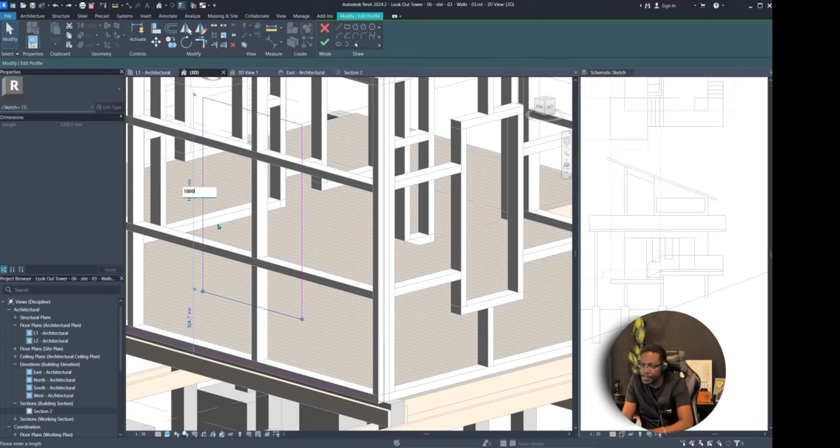Let's go back and edit these windows here. Notice you can click on the individual elements or on the wall - make sure you're clicking on the wall, and you want this to be 600, and the height of the window to be 1800. We need to adjust the temporary dimensions from this. Okay, there we go with the walls.

Now we're going to need to put a rail in here that goes down, so we'll do that at a later time. We need to put the column here that goes all the way up for structural support, so we can use this stilt column we used before. We'll go to column, architectural column, and there we go. Oh, we need to set the base, where the column is going - let's put it in first. So we need this to be at level 1 lower, and the top goes to level 2.

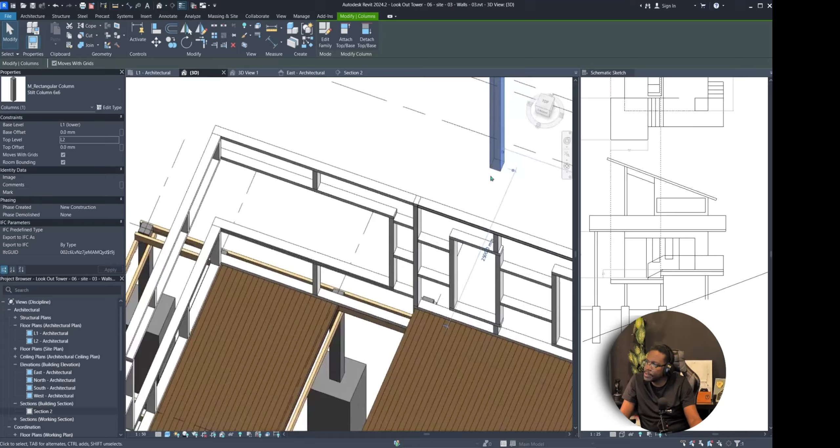All right, now we're going to move it into place. We can use the plan view and put it right there. So this is going to be our structural support. Now we need to add the coverings for the wall, the windows, and the doors.

To do that, we can use the 3D view or the plan view, whichever. So if I'm in the plan view here, I'm going to delete this section view because I only needed it temporarily to help with the windows, so it's going to delete the drawing as well.

Now in this plan view, notice that the floor is not showing the wood material, but that's okay. We can still identify where it is, or we could go to shaded view, which would show us where it is. So I'm going to keep it on hidden line.

All right, so what we need to do is put on those wall coverings. Oh, we do need to adjust this wall - this should actually be on the grid. So we move this in and adjust it. You want to make sure that all your walls are centered on your grid.

Okay, there we go. So that's another point, guys - you want to make sure that your walls are centered on the grid. That's something I'll be looking out for as well, because you have your grid lines there. So just double check and make sure that they're centered.

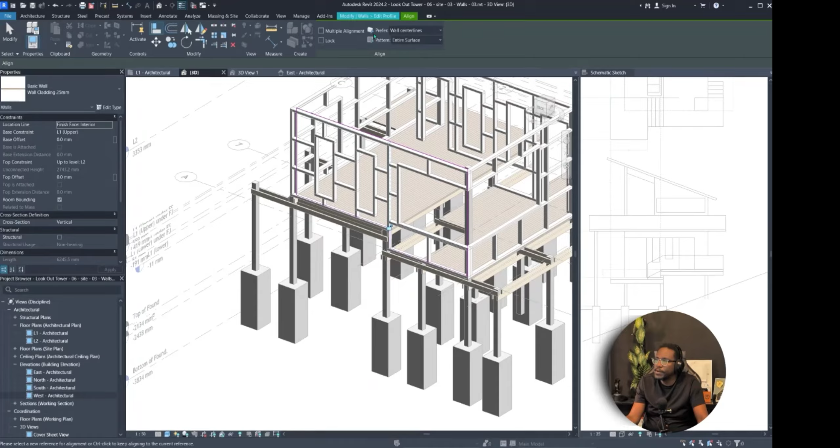Now, of course, we need to edit this part here. So to do that, we're going to use the same profile, and we are just going to draw a profile like that. All right, so that's the profile of our wall. Let's choose OK, so now we have that profile all done.

Now what we're going to do is see if we can duplicate this, mirror it, and then we'll align. There we go. And we need to make some adjustments - let's make this a little bigger.

Let's go to the top view and put this back in the corner. Make sure that this is on the level 1 lower level. Then we're going to put the other walls in and put these on the level 1 upper level. All right, so now we've completely placed all of the walls.

Okay, so now would be a good idea to place the windows before we place the outer walls. So let's get the windows in. For this, we'll be using some fixed windows.

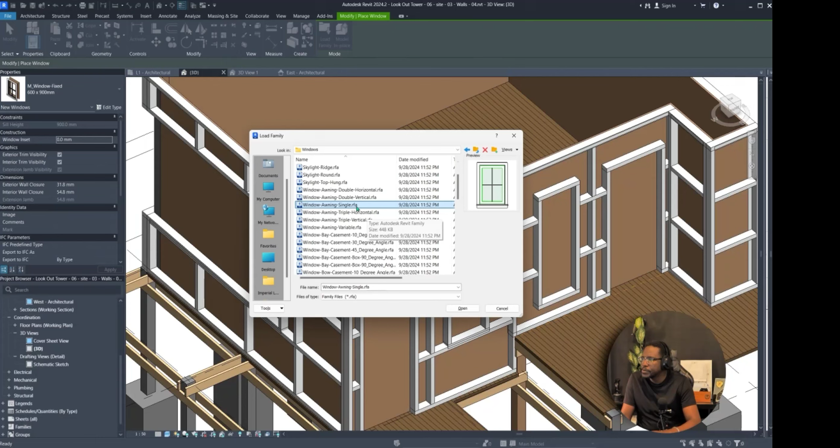So to do this, we're going to have to go to load family, and we will look under windows here. We have a few to choose from here. Okay, let us try and work with these windows and see if we can modify them. So let's go to edit type.

Before we do this, we are going to do it on the exterior. So I'm going to use the mirror tool and mirror this. Then I'm going to delete this tool here. Then let's put back these windows and let's remove the mounting.

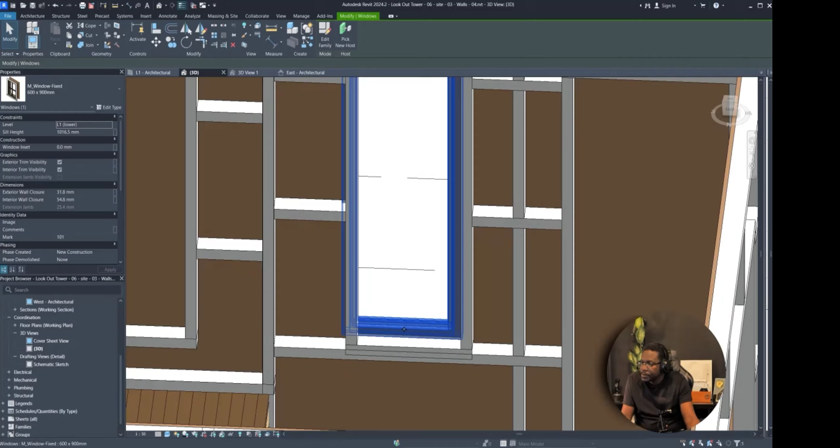For the exterior, we could go without the sill. There we go, so it's just plain. Then let's choose the same dimension as the window, so the width is 600, the height is 1800. We can actually move this around so that we can align this.

There we go, so we have the sill height here. You said to center it on the grid, right? The wall, yeah, but I mean that's recommended. But because when I center it on the grid, it takes a lot in on my internal space per se, and my floor slab is projected on my floor. Right, because it depends on how you position the grid.

The proper way to do that is really that you would want. The proper way to do that is when you draw your walls. If the walls that you draw have their location line at the center, then you're supposed to put your location line on the grid. So what do I mean by that?

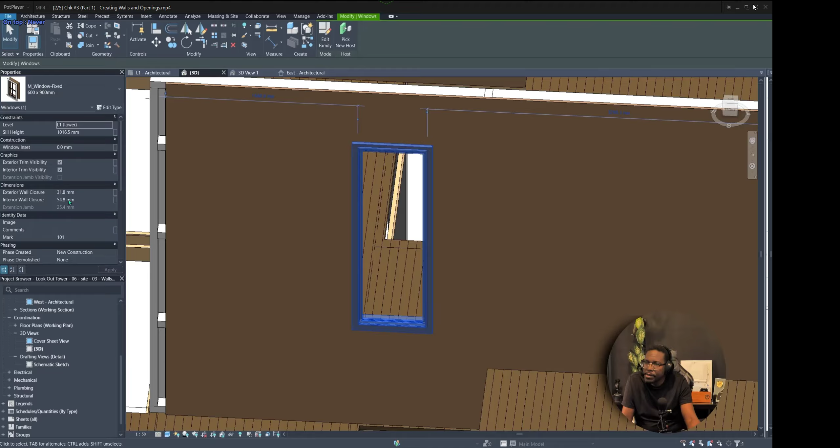So for example, well, this is not always on top. Okay, hold on. Okay. Right, so for example, if I draw a wall, right?

The location line that you see here determines where the center line is. So in this case, the location line is in the center. But I could also choose to draw a wall where the location line is on the finish face interior, so that way the location line is here, right? So when I click on it, you can see these two dots here that tell you the location line is on this side, and this one that the location line is here.

Whenever you draw a grid, the ideal way, this is what you call best practice, is that the grid should go where the location line is. So in this case, the location line is in the center, so it should go in the center of the grid. And in this case here, the location line of the wall is at the end, so you would put it here. As I said, guys, this is just best practice.

You could still have your grid here and make it align with the center of your wall like that. Sure, it's not going to cause your Revit to explode, but Revit is a tool. You guys are just learning it now, but the more you use it, the more you will realize that the best practices add up and they will bite you in the butt in the end if you don't follow them.

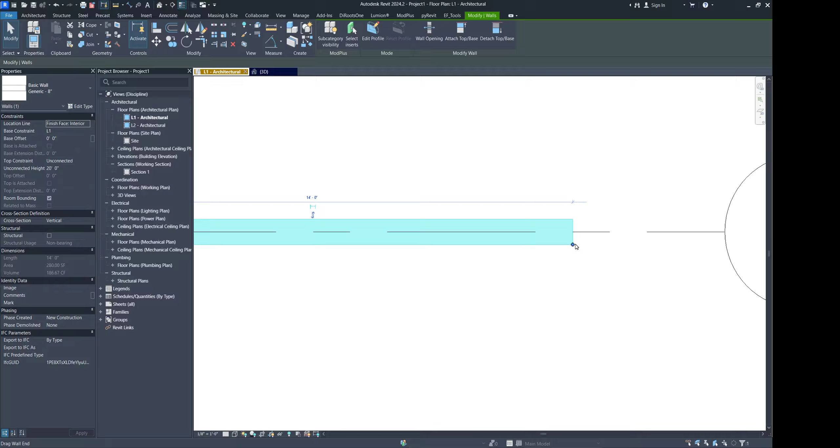So with that said, what I'm marking for is having your grid and showing that your walls are aligned with your grid. So regardless of wherever your location line is, if you have a grid line here, I'm using the grid lines to track how your structure is laid out. It is up to you how you want to align it to your walls. If you want to align it like this or like that, totally up to you. It doesn't have to be in the center.

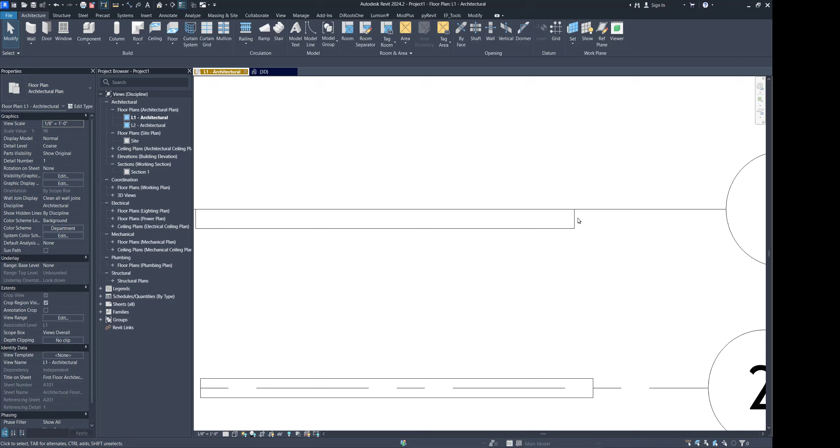All I'm advising you is that if you choose to align it to one side, the best practice is to move the location line of that wall so that it is aligned with your grid. It's just a good practice for you to have in Revit generally. All right? Okay, yeah man. All right, let's proceed, let's see.

That's okay. Okay, let's copy this. Now let's adjust this wall here. Let's align edge of this. Okay hold on, let's see if we can select it. There we go, and let's adjust this.

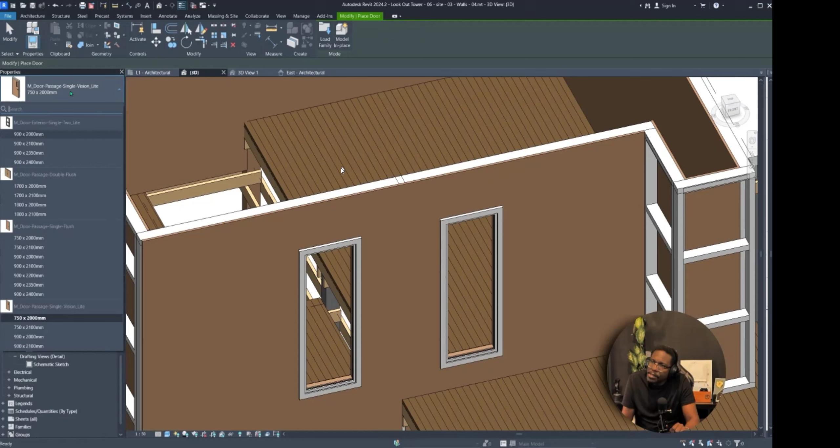Our case might be a little different because we're using a wall for the center, and then we're also using a wall for the covering. This is for the cladding, right? What I would do in that case, if I was creating a wall like that, is that, in this case, the curtain wall is acting as the core of our wall, and then the cladding is acting as, let's call it, the finish, right?

So how I would arrange my location line there. Imagine that I have a curtain wall here. Let me see if I have one built in this project. Oops. Yeah good, I have a storefront. So let's say I'm using this as my grid, my stud here.

Sir, what was the thickness of the panel? Like 1 inch? Yes, 1 inch. Right. So I can, let me see. How would I do it here?

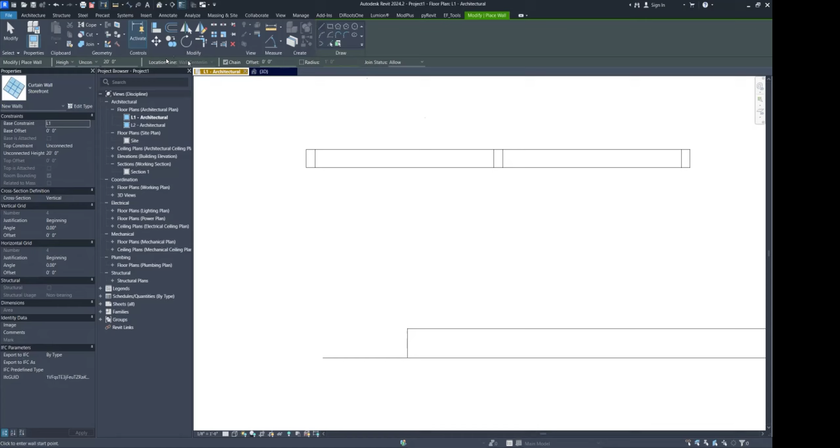Oh, well, with curtain walls, your location line has to be in the center, so you can't change that. So yeah, that is just how it is. Because you see here that the location line for curtain wall is grayed out because it has to be in the center. So that's fine. So if I had my grid line in this case, my grid line could be anywhere. It could be on one end here, or it could be on my center location line.

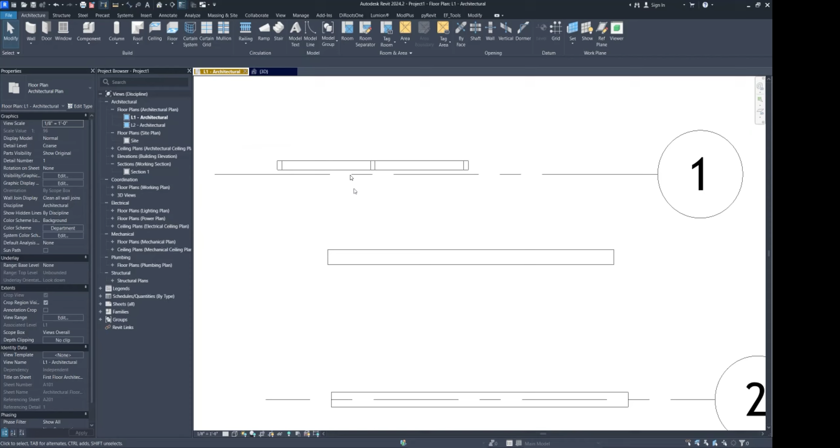Doesn't matter. But when you guys are doing your drawings for your housing project or whatever, chances are you won't be using the curtain wall. You'll be using a regular wall, and that is when that rule applies: wherever your location line is for your regular wall, you want to try to put your grid on it as a best practice.

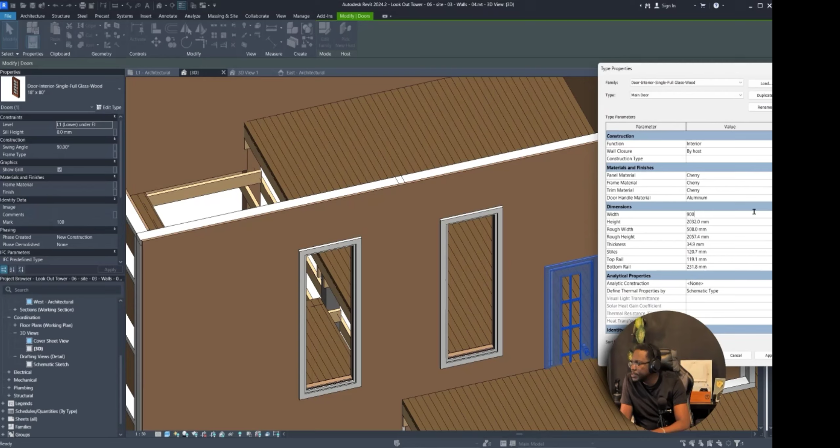All right, let's proceed. Then we're going to call this main door. Let's just call it main door for now. And we'll make the width be, I think it was 900. Oh, actually, okay, let's go for a bigger door. 36 by 80. Yeah, this one. There we go. And if we look back at our profile, let's see. That was 900. Yes, it was. Okay, so we're going to make this 900.

Oh, wait. Actually, we can use the arrow keys to nudge this over. There we go. All right, so let us do the rest of this. Let me mirror this. We're going to do the same thing for this and same for this. Let's pick a window, and we're going to duplicate it and call this front window. The width, let's look at the profile. It was 1200 actually. I think this one we can put back the mounting.

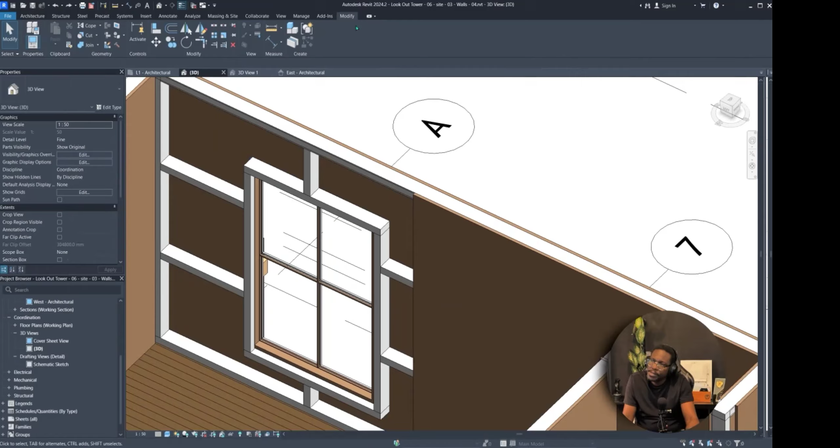Let's see if this will work. Let me open this up, and if we go to the move tool, we can grab this in the center. Actually, what we can do with these windows to make sure that they're centered is go to the plan view, and this is that space that we have here, so we can just grab it at the center of the window and move it to the center of this space here.

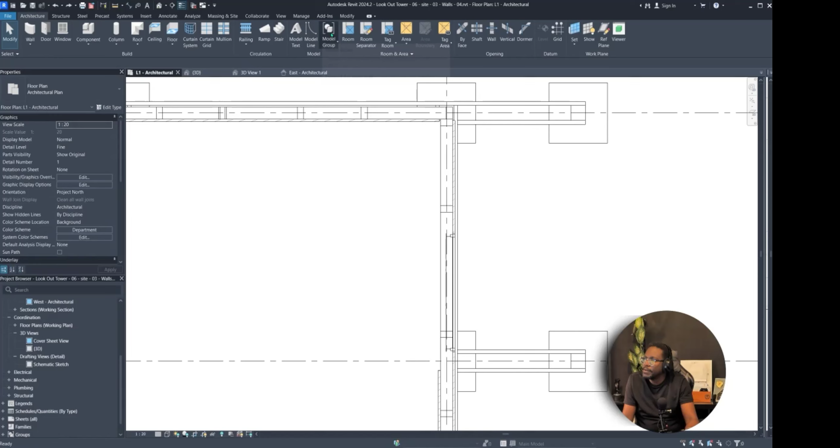If I use my dimension tool from here to one edge of this window, no, actually, let's use the model line, okay, let's use the detail line because we don't want to have to worry about the height. So we use the detail line to outline this, and the shortcut for detail line is DL, and we can move this using the center. There we go. So we use this as a kind of construction line, and with the detail line, we don't have to worry about it being in 3D space, right?

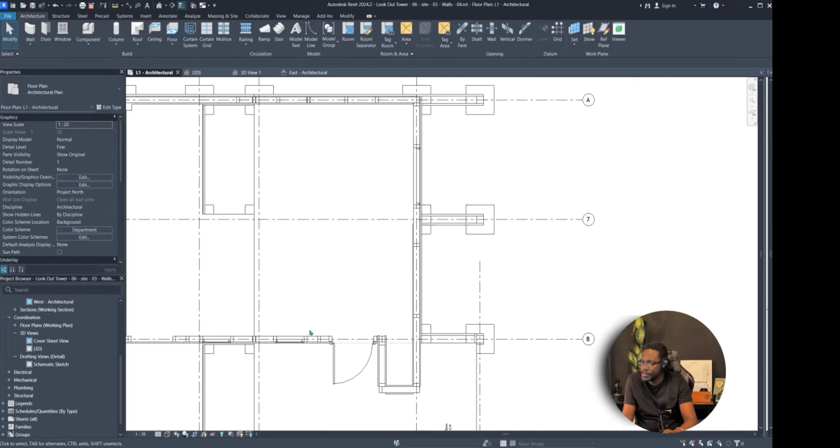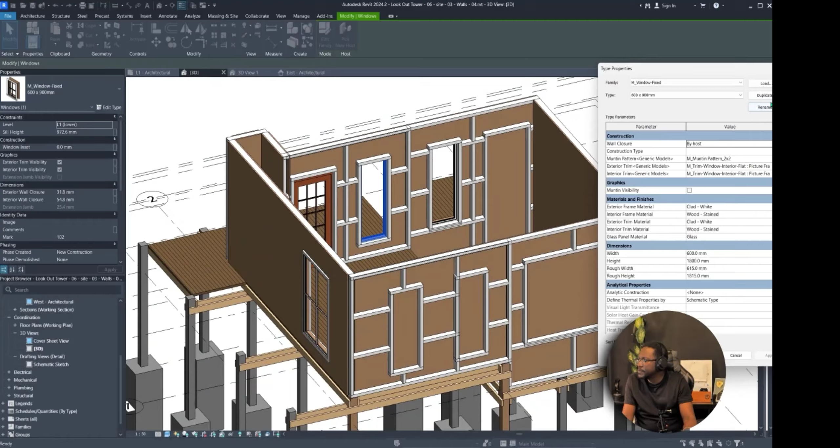So now we know that this is centered, and we can do the same thing with these other windows because we need to center them in this space, and I don't think we're going to find the center of this space so easily. Let's see. Yeah, that's the center. Do the same thing here. Okay, let's go back to 3D view. Let's get in these other windows. We actually didn't rename this, so we need to rename it and call these main windows so that we can identify them easily.

All right. Always a good idea that when you create your windows and doors, when you duplicate the family, give it a name that you can recognize. When I mirror this, it should, yep, there we go. All right, let's close up these walls. Okay, so we need to add in a window here and a window here. Oh, there are actually 3 windows.

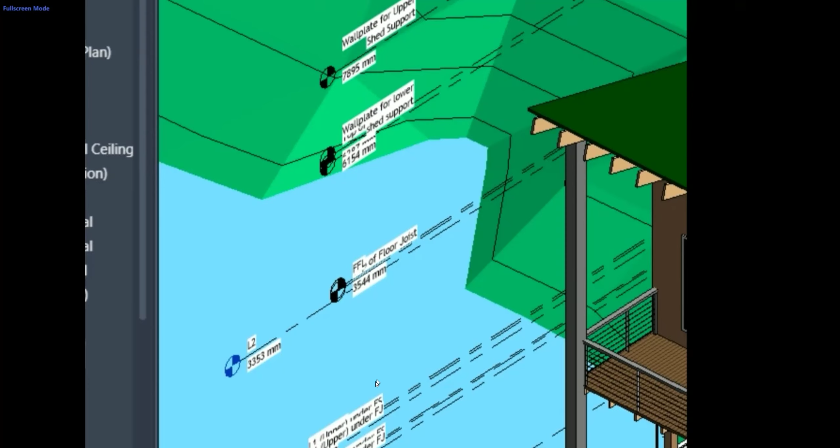Let's go from plan view. Okay, so here are the windows. So it needs to go in here. Let's grab this. Don't think this is the center because there are 2. Whoa. Oops. Okay, give me a second here. Did I mess this up? Give me 1 second, guys.

Okay, so right. So I was dealing with that corner window. My bad, I seem to have pressed something. This is our outer wall here. So we're going to go to wall and we're going to use curtain wall, the storefront, and we're going to start from here and we're going to draw the first wall all the way to the end there.

So what I'm doing here is that I'm using a storefront as my window, right? So you don't always have to use a window for a window. If your design has something that you don't have a window to represent, you can use a storefront as a window. So the curtain wall is very versatile because you can use a curtain wall as a wall, and you can use a curtain wall as a window as well, right?

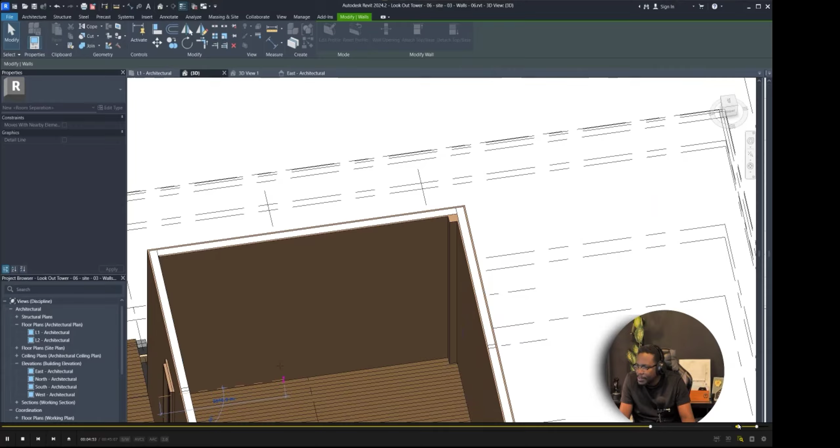So that corner detail that I have as these triple windows is right here. So rather than choosing three different windows, I just chose to use the curtain wall as my actual window. Open this wall up and we'll do the same thing here. Kind of open this up. Right, so you can see that we have the wall here. Now, in order for this to be a corner window, we would need to take this all the way to the end. So let's align this with...

Yeah, go ahead. Sure, so you're saying we can just put a glazing in the window openings in the curtain wall instead of putting an actual... Well, you do have to use windows because I mark for windows. So right, you would have to put a curtain wall in that space. It wouldn't be practical. From a construction point of view, that's not how it would be built. And we're still guided by that principle when we're marking, right? All right, sir. So I would use a regular window.

Don't forget that you have to use louvers in the design. They don't have to be louvered windows, but somewhere in your design, you have to use louvers. You can choose if you want to integrate it in your window, in your door, or you just want it to be a separate thing. In my case, I chose to make it above my doors. You have a transom that is louvers. That's how I chose to use it. But it's a decision that is totally up to you guys. How do you want to incorporate louvers in your design?

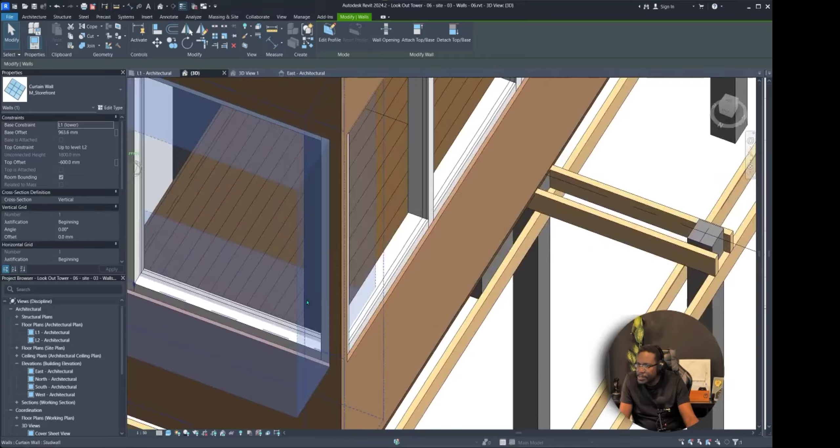Now we actually need to carry this all the way to this edge here and carry this one. If we can find the end, there we go. All right, now what we need to do is use tab to tab into the frame, and we need to unpin it, then delete it. Same thing for the other frame. Unpin and delete. So notice, guys, that you can actually delete elements in your curtain wall, but you have to unpin it first. So even if you're creating the studs and for whatever reason you don't want a stud in a location, you can just tab into that specific curtain wall element or that stud and just delete it.

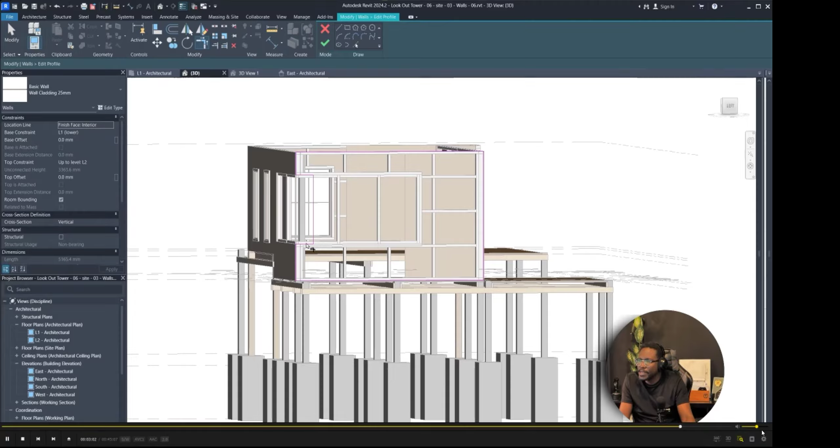We're going to edit the wall profile of this wall and this should work. Yeah, we have some weird lines here. There we go. So you can see the wall profile is like this. Okay, now we need to do the same thing for this wall here. So we're going to align this. All right. Now we do need to figure out the internal walls, but we're going to do that in just a bit.

We just have one more door, and this door here should have the transom above it. So we're gonna copy this door, put it there. Oops. And line this. Okay, let's look at the top view. Now we did say we wanted to have, hold on a minute, I think this needs to be flipped. Okay, let's save. Right, so we do want this to have a transom above.

So we're gonna insert like a louvered window. So we are gonna go to Windows. We're gonna have to import this window. So let's look under Windows. Let's see if we can find it. There we go. All right, that's it. Now we know the width of this window is 900.

All right, now we can deal with the internal walls. So we need to. Okay, we can use this one. Oops. All right, so it also duplicated the windows as well, so we don't need that. So now what we want to do is attach. Okay, wait, let's fix this.

Now what we're going to do is attach these together. So we're going to use the join tool. We're going to join this wall with this wall, and that will automatically give us all the cuts. So let's use the join tool and join this wall with that wall, and this wall with, and this with that. All right, and with that, that is our walls that we have.

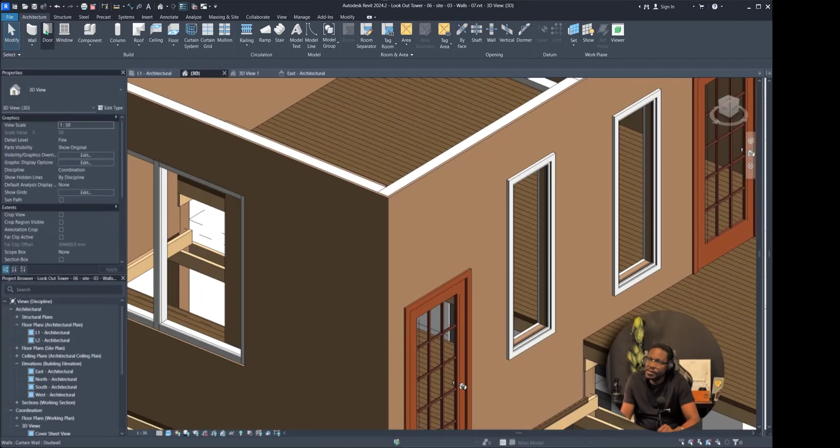So guys, this is our objective for this week, right? I want us to complete all of the ground floor walls for your project, right? Put in all the windows, put in all the doors. You're going to be using the curtain wall tool, or you can do it the manual way that we did in our class activity, where you actually draw every stud if you want. But my recommendation is going to be using the curtain wall tool, which is in the tutorial video. So I want you to use the rest of the class time to try and get this done.

Now, over the next couple weeks, let me look back on our class schedule here. Right. So we are now at checkpoint 3, right, guys? And checkpoint 3 is going to go from now till October 25. After that date is when I'll be marking checkpoint 3 and grading it. So every class, we're pretty much going to be doing walls, floors, railings, roof. And we're going to split that across the next 3 classes.